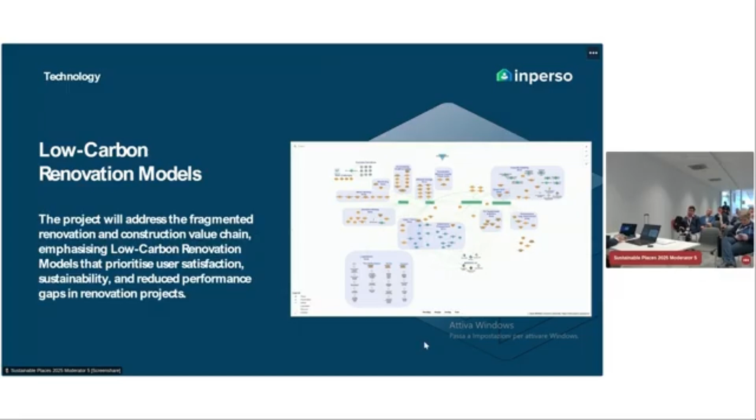It is also connected to the Rialto application, which uses artificial intelligence technology to audit and report on construction management work. And R2M is developing a big part of this. Moving to the low carbon renovation models, INPERSO aims to address the fragmented construction value chain. Low carbon renovation models developed are prioritizing user satisfaction and sustainability, working together with all the stakeholders. We have also developed a dynamic map that has been integrated into the RE Suite platform, which will help all participants to make better decisions.

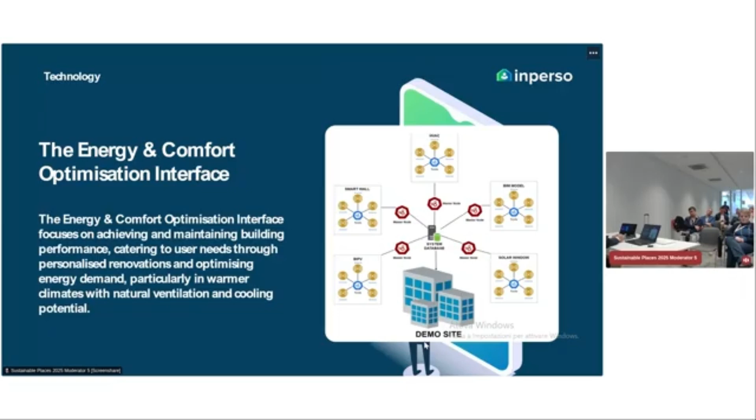The energy and comfort optimization interface is the last one of the digital tools. It consists of a multi-stage energy consultant system that is connected to this interface, using a low-cost wireless network sensor to evaluate air quality, energy demand, and comfort conditions.

And finally, the retrofit kit, the physical part of our project. It aims to reduce construction and demolition waste, enhance productivity, upskill the workforce, improve workplace conditions, and reduce embodied CO2 of buildings. This is the retrofit kit.

We can start with the smart wall. It's a prefabricated all-in-one wall panel. It's a multi-layer system that can even include autonomous air conditioning devices and other types of products such as PV panels and so on. The second is the energy pod. It's an intelligent plug-and-play HVAC system that uses PCM material, and it also incorporates energy storage and a PV inverter.

The third one is this type of building-integrated photovoltaic panels to be installed in roofs and balconies, with a special interest in heritage buildings. Next, we have the solar window. The solar window includes a PV Venetian blind shading device inside an insulating window between two glasses.

And this kit is composed of some of our innovative products that INPERSO is going to integrate in the pilots in order to achieve TRL 8. Of course, we have the 3D printer system, but I'm not going to talk to you about it because the next presentation will do it.

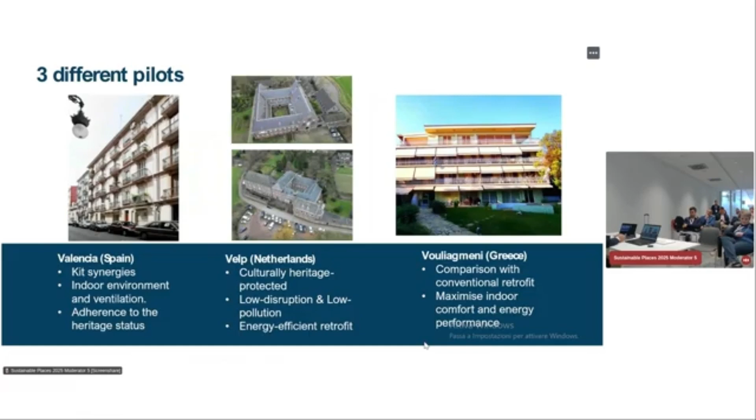Okay, let's move to the pilots, to our 3 pilots. We are going to explain briefly these technologies that have been implemented in the demo cases. One is located in Spain, the second in the Netherlands, and the third in Greece. The first is a social housing rental building whose main facade and volume are protected, with a market on its ground floor.

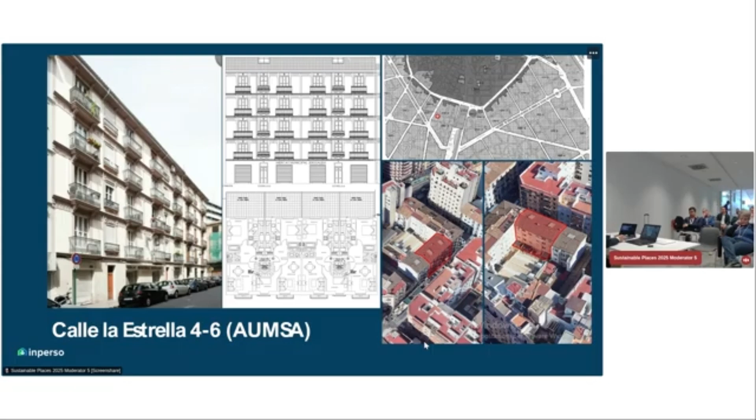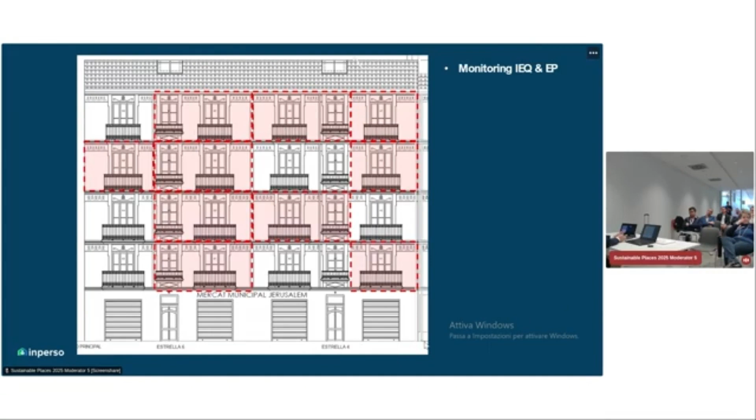Calle Estrella is located in the historic center of the city, and you can see in the pictures the 2 facades of the building, one facing the city and the other the courtyard. We have had multiple difficulties developing this project, but finally we are developing it. We are monitoring 10 of the 16 apartments, and we are doing interventions in 7 of them.

The first one is installing 6 new balconies with 5 groups of PV panels that are going to be installed in the back facade, which is not protected, and this facade will receive a commercial ETICS. You can see the final design on the bottom right side of the screen.

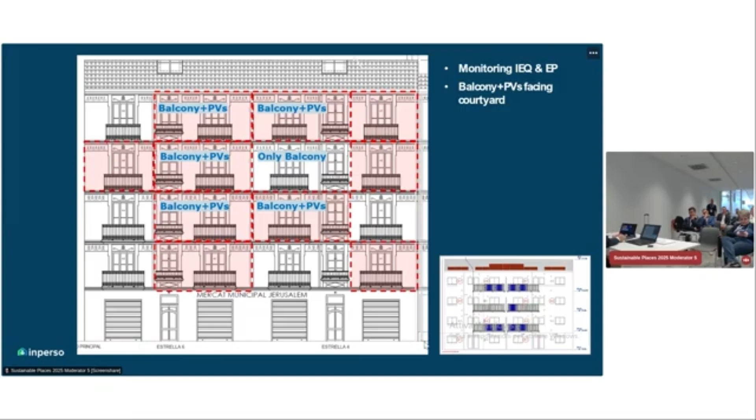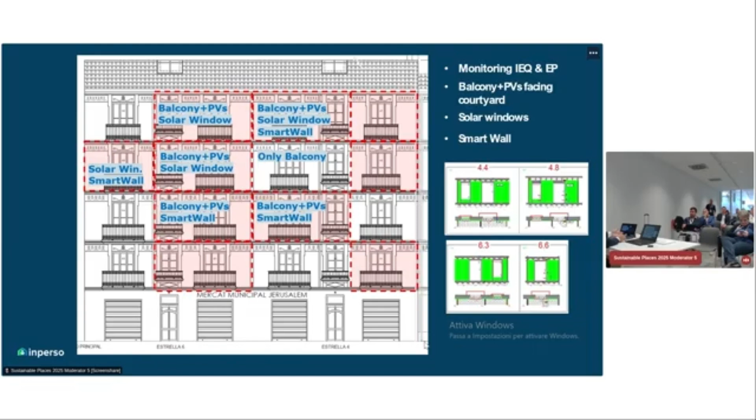We are going to install in 4 apartments this type of solar windows that are designed specifically for the protected main facade. We are also installing 4 units of the smart wall on the indoor side of the facade. And finally, 4 units of the energy pod will be fitted in 4 apartments.

Moving to the next pilot, the Trinity Complex, it's in Velp. There are 3 highly heritage-protected buildings: the church, where intervention was not allowed, and 2 ancient monasteries, one called Emmaus and the other Bronhorst, that have been converted into temporary residences for low-resource people. Due to this high level of protection, the intervention has finally been restricted only to Bronhorst Monastery, which has been monitored since the beginning of the project.

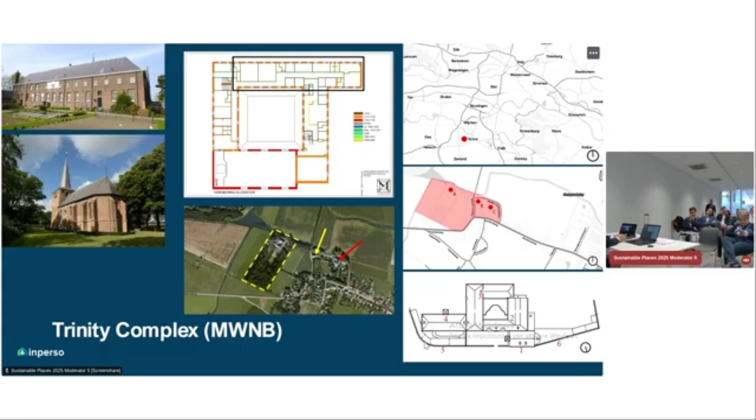Despite the small scale of the intervention, a big impact is expected due to the big issues that always appear in this type of heritage building. The work is small, but the results are huge. Only 1 room is going to be intervened, installing a solar window and a smart wall unit.

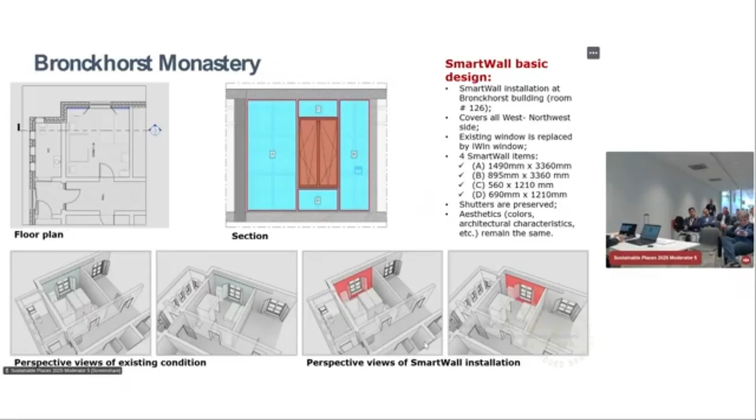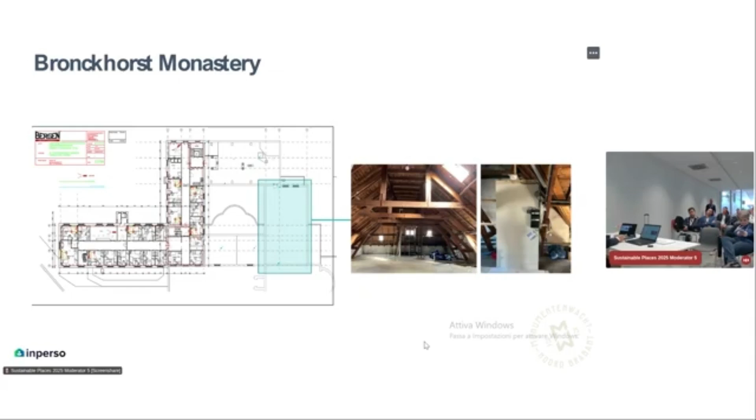But we are also going to install 1 energy pod in the attic to supply 2 of the rooms. And finally, we are going to do the most interesting intervention for me, the most interesting restoration work, which consists of replacing part of the damaged chapel roof with photovoltaic tiles with the same shape and the same finish as the originals.

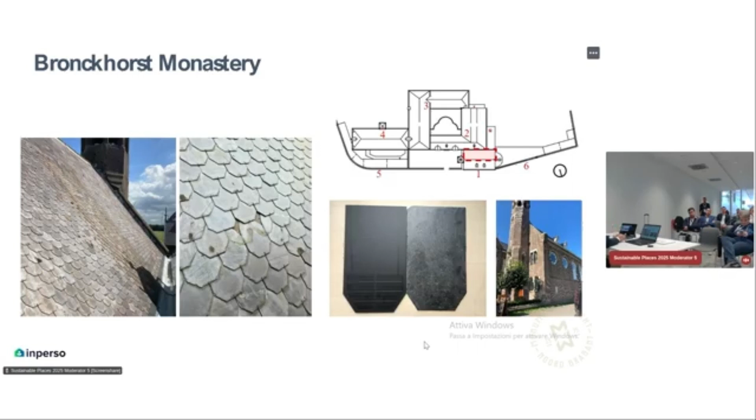This is the third pilot. It's located in Vari-Voula-Vouliagmeni, near Athens. I don't know if I have said it correctly. It has already completed its renovation, unlike the previous two, which we are starting in the coming months. It consists of the energy renovation of a social residential building built in the 1960s, now dedicated to people at risk of exclusion.

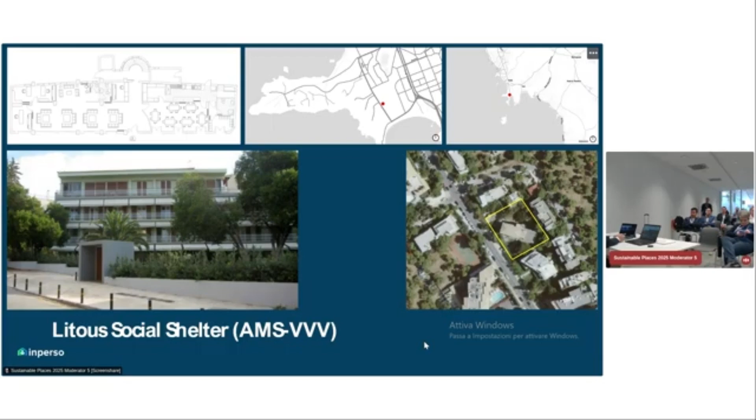In this case, in order to compare INPERSO technologies with traditional solutions, a commercial ETICS has been applied to some parts of the facade. On the right side, you can see it in two levels, in blue, and on the left side, you can see it in the side facade and the main facade, the southeast facade.

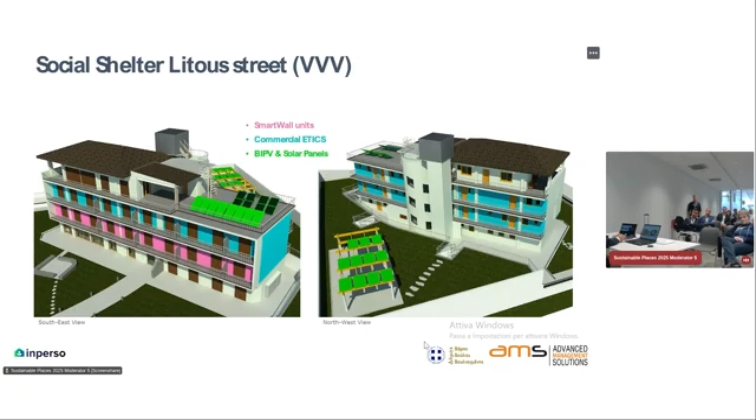At the same time, the smart wall solution was installed in the first level of the south facade, as you can see in pink, employing 27 units, 4 of them with an integrated ventilation system. BIPV panels from Metso were also installed at the pergola, as you can see in green, and on the roof. Conventional panels, not integrated panels.

And finally, this is the last one, sorry, Ruben, for the extension. We present the expected impacts that are already being evaluated. You can see both time and cost savings and quality improvements regarding the full life cycle, the construction phase, and the operational phase.

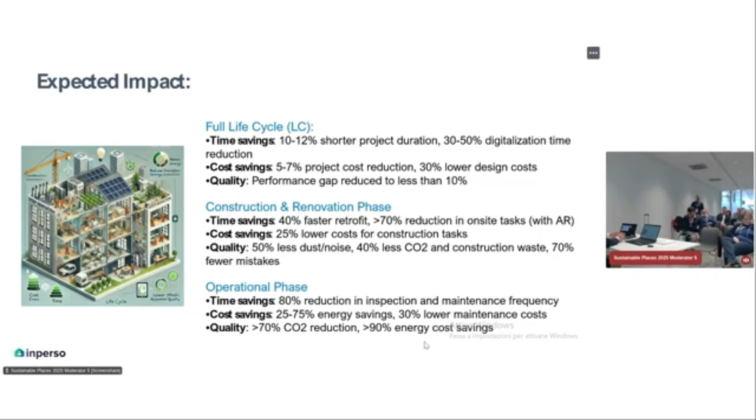If anybody has a question while I do the next presentation, feel free to ask. Yes. You now, because we are going to leave. No, I have a... I mean, does anybody have a question about the project? If not, I ask. Okay.

Come on. I mean, I saw that you had a few sessions with the stakeholders. How different were they between different countries? I mean, you did one in Spain, one in the Netherlands, one in Greece. Yeah. Well, I'm not directly participating in the sessions, but I know something about it, of course.

I think in Greece it was very, very difficult because tenants or residents are people at risk of exclusion, and they are not very interested in this type of renovation, and they are changing every period. I think that here the most important is the contact with the managers of the building. They are willing to participate and to do this type of renovation. That was good with them, but with many restrictions about the residents.

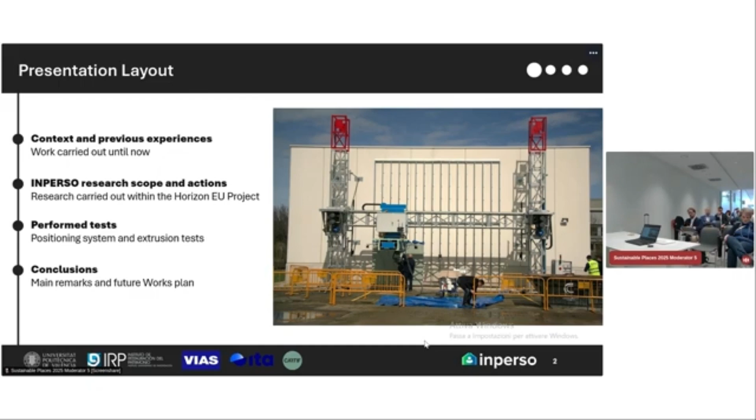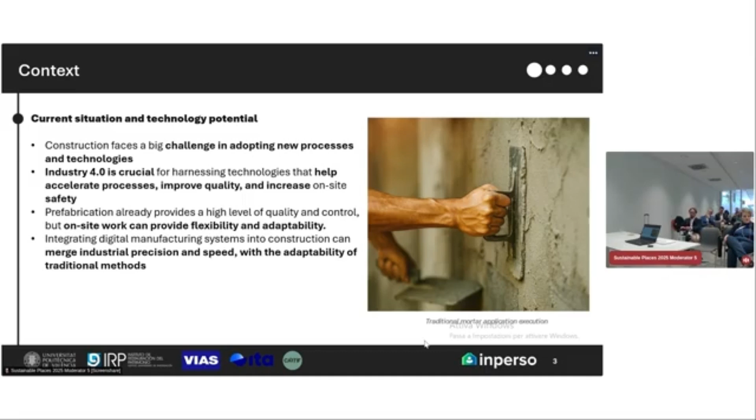The current situation is that the construction sector is facing huge challenges regarding the adoption of new processes and technologies. Industry 4.0 is crucial to help accelerate processes and increase quality and safety. Prefabrication has already gained a lot of momentum, but we are still lacking flexibility and adaptability in on-site work. That's the context of this technology. We need construction to merge industrial precision and speed with the adaptability of traditional methods as well.

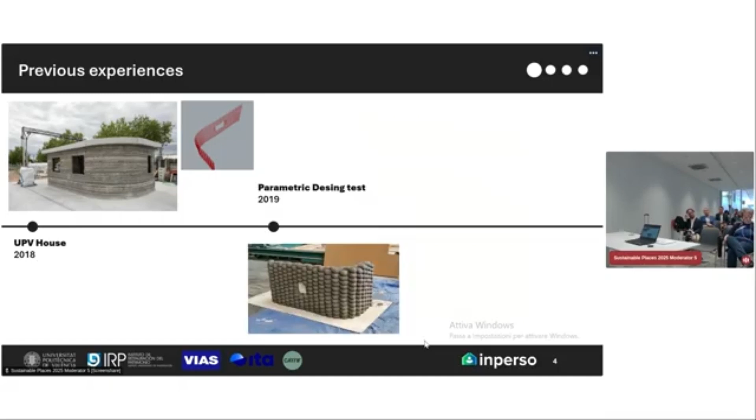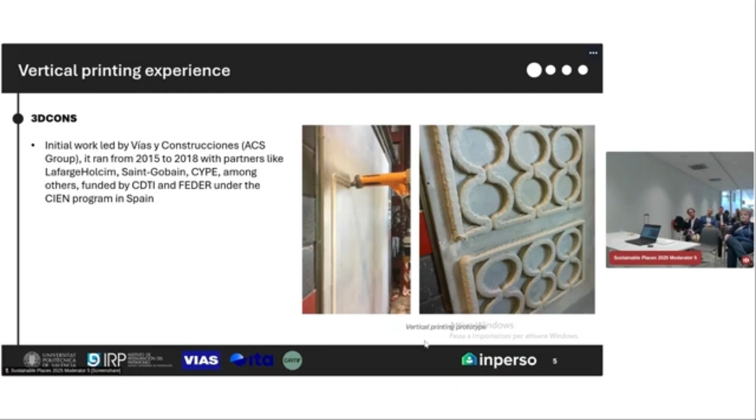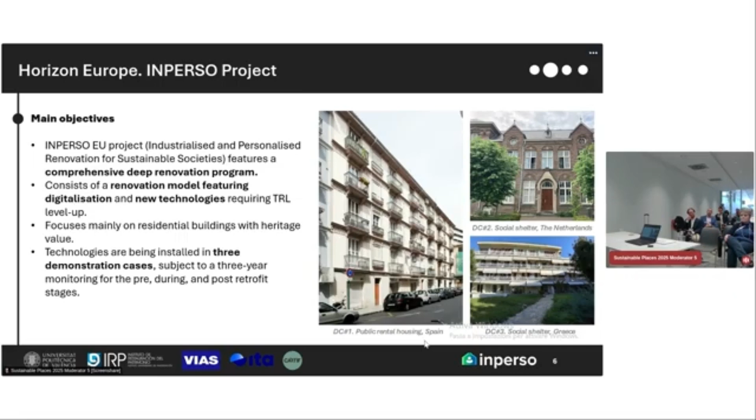As UPV, we had some previous experiences in horizontal printing, always generating the codes for the trajectories and exploring different kinds of pumps. Also, VIAS and Cartif worked in a project called 3DCONS that had some preliminary experiences in printing vertically. As José Luis explained, we have 3 demonstration sites, but we are focusing now on one of the technologies aiming to level up the TRL, that is 3D printing.

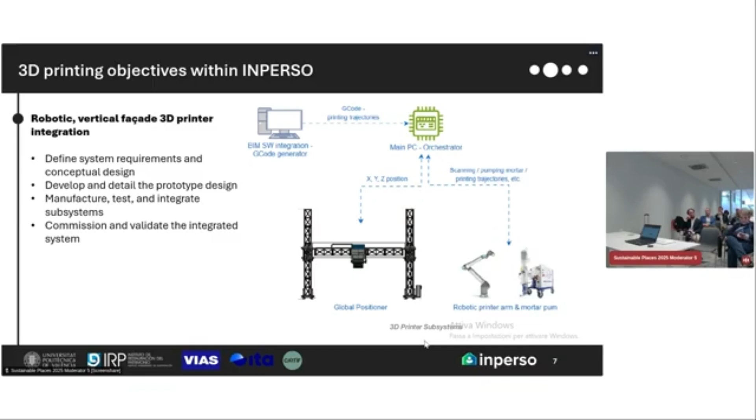In the scope of INPERSO, our task is developing the extraction from the BIM software of the layer that we want to print. With this, we have a main orchestrator that uses the G-codes we are programming, one for the global positioner that positions the pump in different sections, and then the robotic printer arm and mortar pump that print in an area of a 1.5 diameter circle.

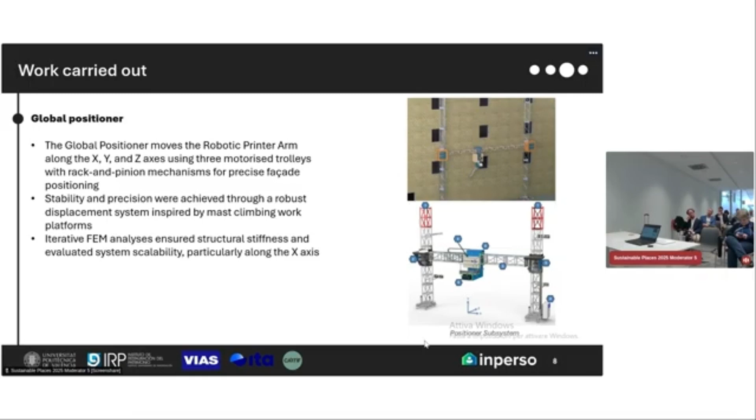The global positioner is being developed by ITA, with XYZ axes developed with a motorized trolley with a rack and pinion mechanism for precise facade positioning. This system has achieved a very precise and stable structure, developed considering the stability of the system.

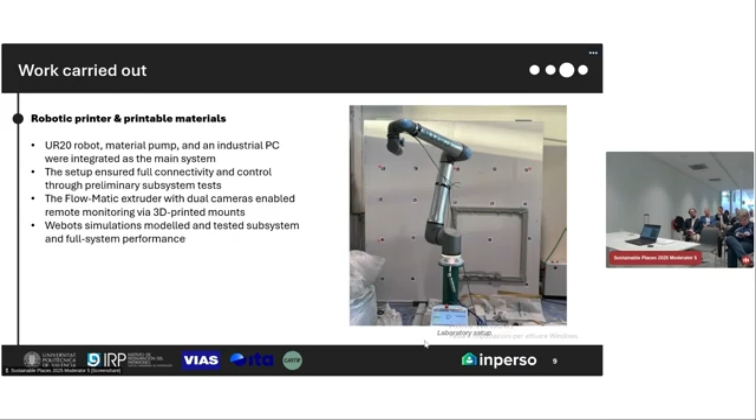Regarding Cartif, ITA and VIAS, we have a UR20 robot that is in charge of the positioning of the pump and the printing. This has been developed using a Flow-Matic extruder with dual cameras that also help monitoring the 3D printed areas, and a LiDAR system that detects elements that may be colliding with the system or that may not be present in the BIM model or in the scanning elements.

It's important to say that R2M has provided the scanning of the building, so we have the pre-existing conditions of the work. As UPV, our task is developing the transfer from the BIM work to the G-codes.

As you can see here, we have the wall partition in the BIM with the openings, and then we define the areas that are the maximum areas that can be printed by the robot. We position these areas considering the holes, and then define the trajectory from point A to B, aiming for the shortest time, the best adherence, and the best conditions for surface quality, with as little assistance from an operator as possible.

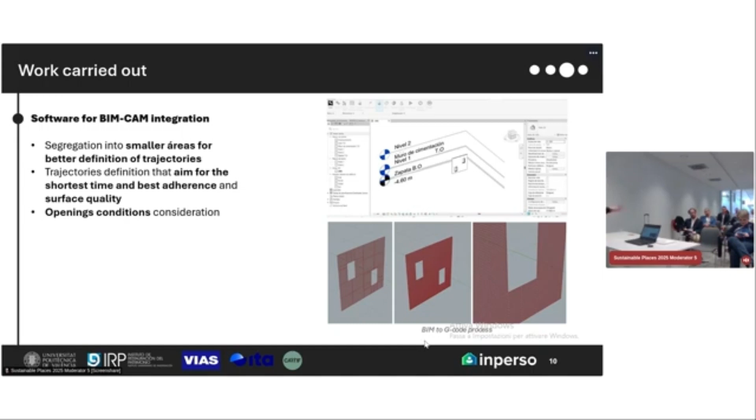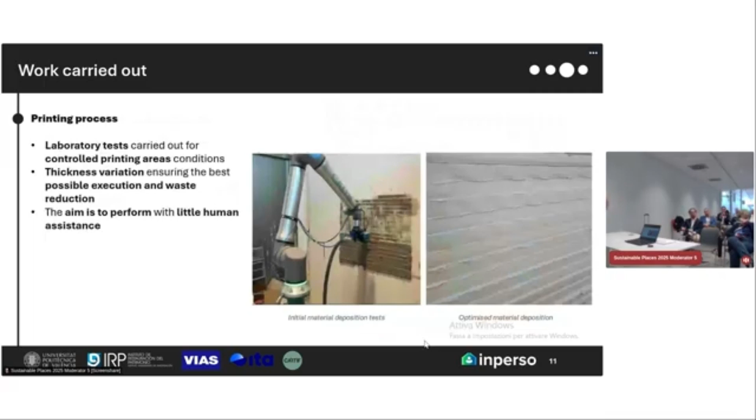Finally, regarding the printing process, there were many tests. We had to test the adherence, the distance of the layers, and the flows of the product, so we could aim for the most optimal surface. This way the operator has to do as little work as possible, with the aim of performing with little human assistance.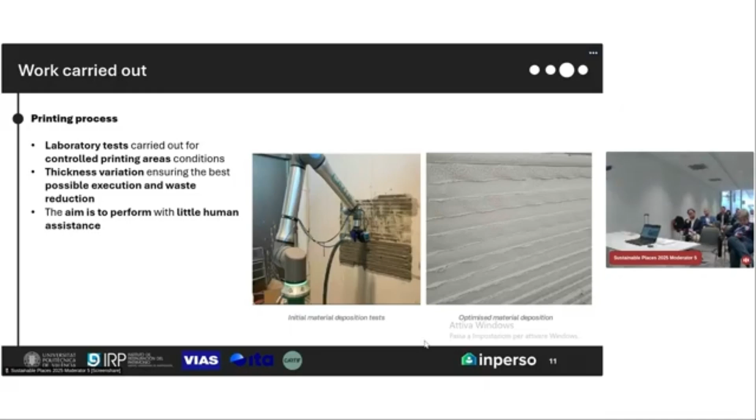It's important to say that this robot is a collaborative robot, so we are also aiming for the safety of the operators.

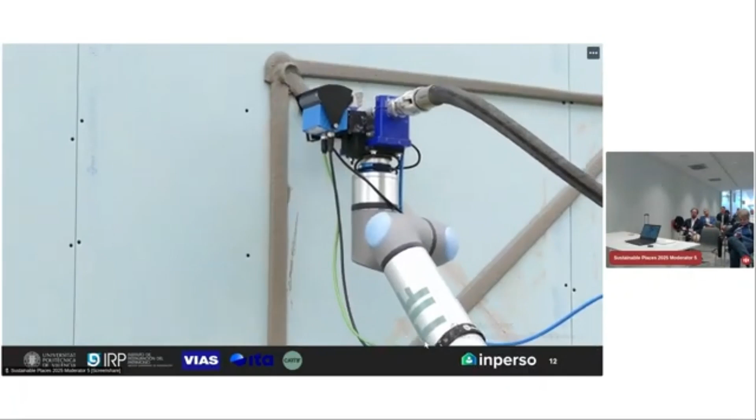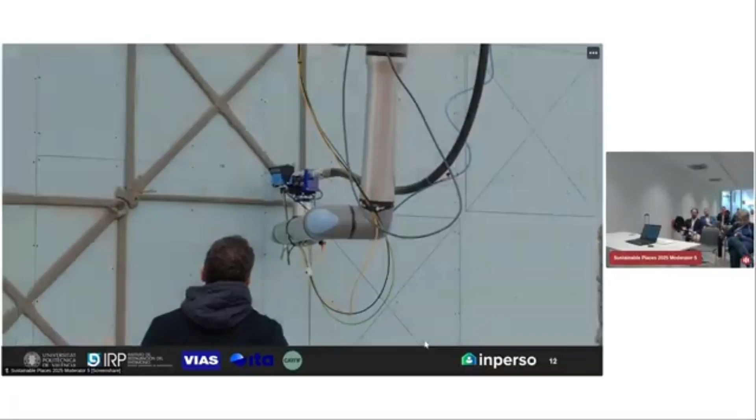Here we can see how at the beginning we were testing on a 6x6 surface, how these 1.5 by 1.5 squares, circumscribed within the circle, were going to be positioned, and then testing the different distances between the layers and the extrusion of the pump as well.

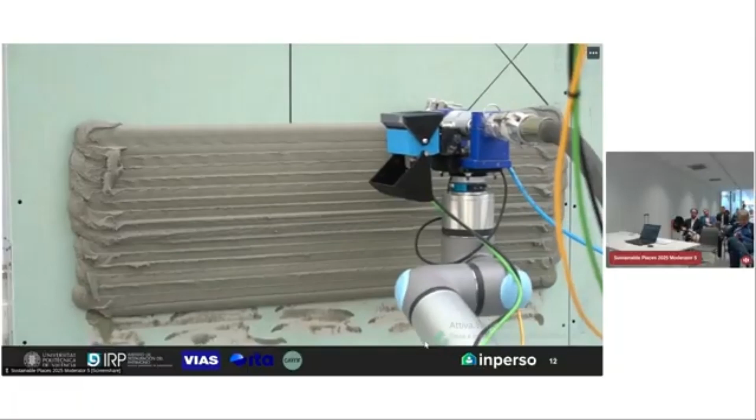Here we can see the LiDAR element that is also detecting any variation in the surface, so this can be done in the perfect way.

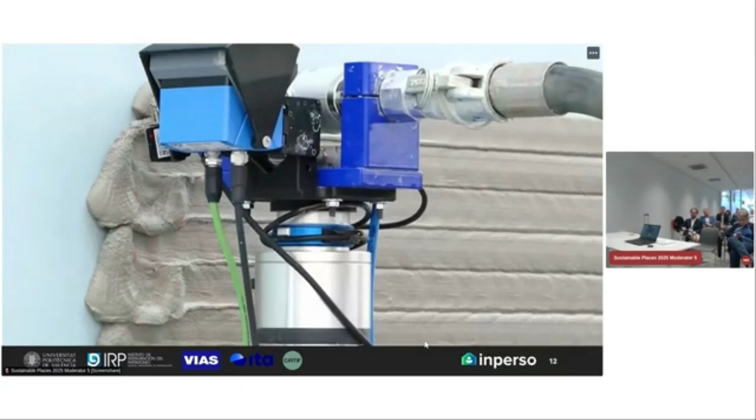As main conclusions, this technology aims for existing buildings, which is one of the biggest challenges in construction, and also for energy renovation, giving this mortar thermal properties in the future so we can use it as an insulating element. As you know, outdoor insulation is the best solution for avoiding thermal bridges, so this is a good line of work we are pursuing.

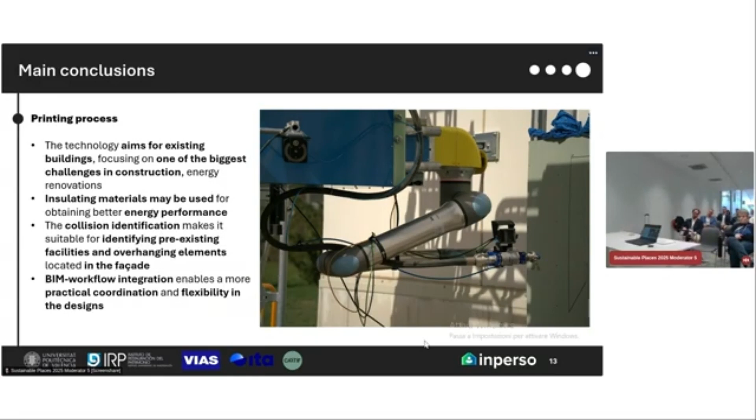Collision identification, not just for openings but also for overhangs and other elements that may be present, is a huge problem in the retrofitting industry. Also, the BIM workflow will allow for a much better and more fluent relation between the project and what is actually performed. When we include scanning elements with LiDAR, we can have a very precise approach to existing conditions, which are not always as projected.

Thank you very much. If you have any questions, please.

Very interesting and quite impressive. I like it.

How does the thing stick to the wall? Is it sticking, or is it falling sometimes? For that, the material composition being developed by VIAS, it was very important to ensure the right amount of viscosity to stick, but at the same time the right amount of fluidity to circulate smoothly in the pump. This was achieved through a lot of tests in order to find the best solution.

I was wondering, in many cases when you renovate, they use this very fine mesh, and manually put the mesh and slap the screed on top. Are you looking to do that as well, to see if, when you introduce this extra layer component, it's necessary? Yes, I understand that in the future, because we are still in a very controlled area, it should require some mesh, because when working with very long surfaces, that's why it's so important that it's a collaborative machine. It's not that you leave it working and walk away, you really need the operator to ensure this continuity of the material.